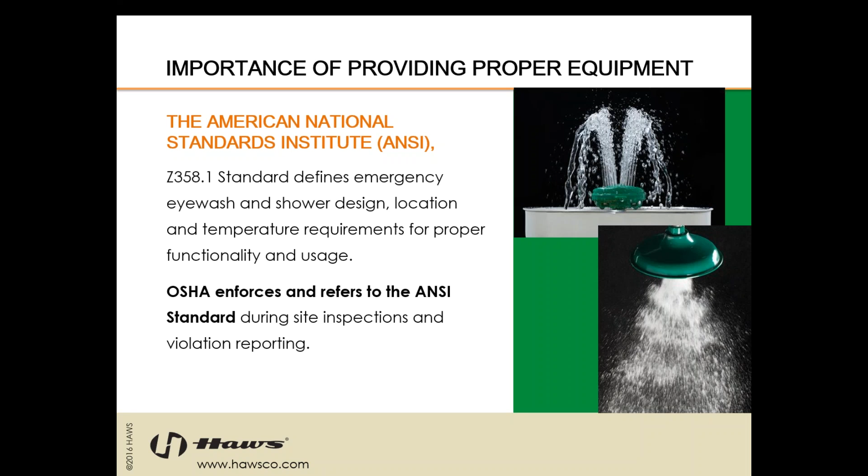The Canadian Centre for Occupational Safety and Health, also known as the CCOHS, references and recommends the ANSI standard also. Each province has its unique regulations, similar to here in the States, where each state may have unique regulations on the local or state level. The Canadian Standards Association, the CSA, also references OSHA, which again enforces the ANSI standard.

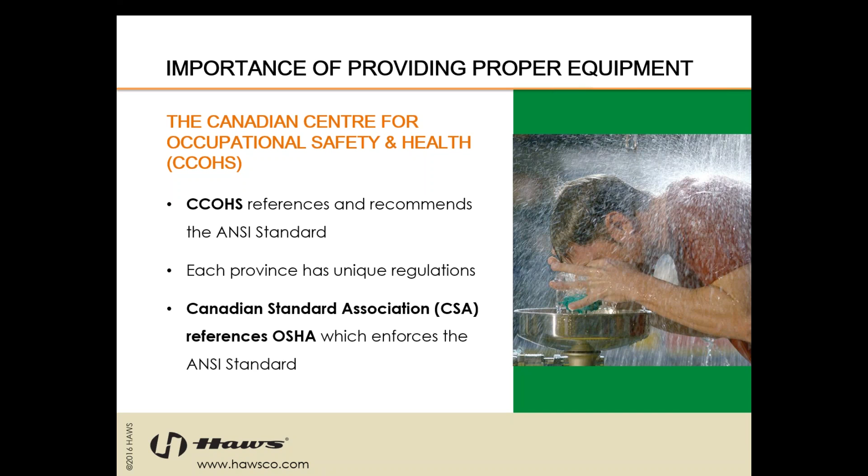Another thing that we want to point out is that OSHA fines have increased. On November 2nd of 2015, it was signed into law that OSHA fines are increasing for the first time since 1990, and they're going to increase by 80%. This actually already went into effect on August 1st of this year. An example of that is a penalty for a willful violation would rise to $127,000, up from the current $70,000, which is quite a significant fine for a willful violation.

So the important thing to do here, and the first step really, is we need to consider the potential risks. So the first thing you need to do is review your operation from the perspective of the materials that your employees handle, the volatility of said materials, and the likelihood of a spill or splash accidents that may injure employees or others around.

So in order to properly identify the equipment we need to ask a few questions. The questions are these: do the safety data sheets of materials used in your facility call for immediately flushing or drenching upon exposure to the skin or eyes? Is the hazard likely to affect the eyes, face, body, or even all three? Is there plumbing near the potential hazard? This will define whether you'll need a plumbed or a self-contained unit.

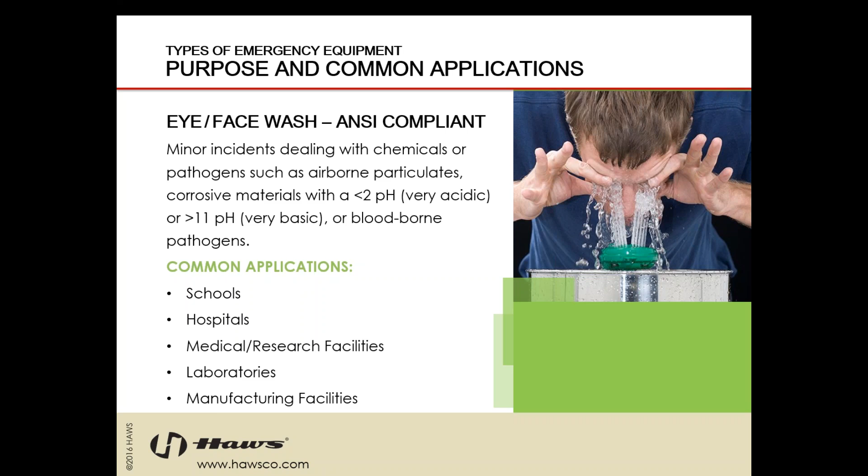A drench shower. This is a total body decontamination where a chemical acid exposure to the entire body is present, but eye-face rinse is not required. To be perfectly honest, this is kind of a rare bird in what we do. A situation where your entire body could be exposed, but the eye-face not, is very rare.

And the common applications listed here, you see loading docks, warehouses, hospital decon units. The last one there, the hospital decontamination unit, is really where we would see this most commonly. Think of a scenario where a worker has a hazmat suit on, even the helmet, the entire works. They may need to decontaminate their suit once they've removed their helmet to get access beyond into the hospital or any other areas they need. They might need to decontaminate their suit before leaving the area. So that's really where you're going to see this. Once again, not a very common application.

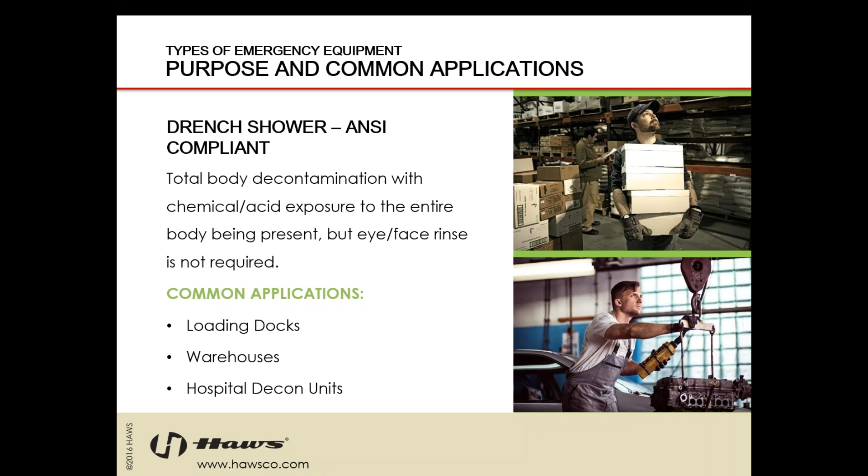In any situation where there could be a complete body coverage during a spill, we always want to assume that the eye face is also involved in that spill, which is where we come to the combination unit, really the workhorse, the most common piece of equipment that most any manufacturer will sell. These are for total eye, face, and body decontamination with highly corrosive chemical or acid exposure to the eyes, face, and body being present. Some common applications, again, chemical plants, refineries, manufacturing facilities, warehouses, but really, once again, anywhere there is a chance that there could be a hazardous spill for our employees, we want to make sure we have full body coverage, including the eyes and face.

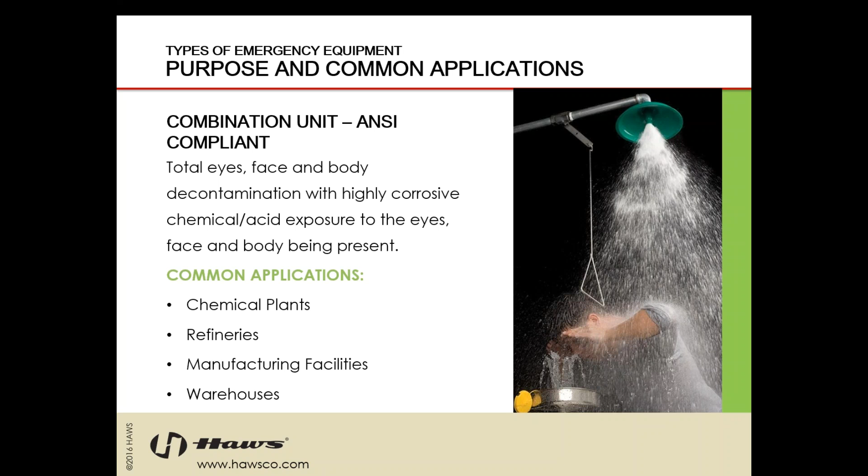Tempered water systems. These are for environments where the incoming water is not within the ANSI approved tepid water range, which was set at a minimum of 60 and a maximum of 100 degrees Fahrenheit, which is 16 to 38 Celsius. These are to be provided to the eye wash and or shower. Common applications, really any industry. Extreme climate conditions are most common. Situations where there is limited water access, or an enclosed temperature control needed.

Basically, it's too cold outside, even with tempered water, to expect someone to get into a shower for 15 minutes. As you can see on the bottom picture there, there's some snow on the ground. We can't expect someone to stand outdoors exposed for 15 minutes, even with tempered water. A heated enclosure is really ideal for that.

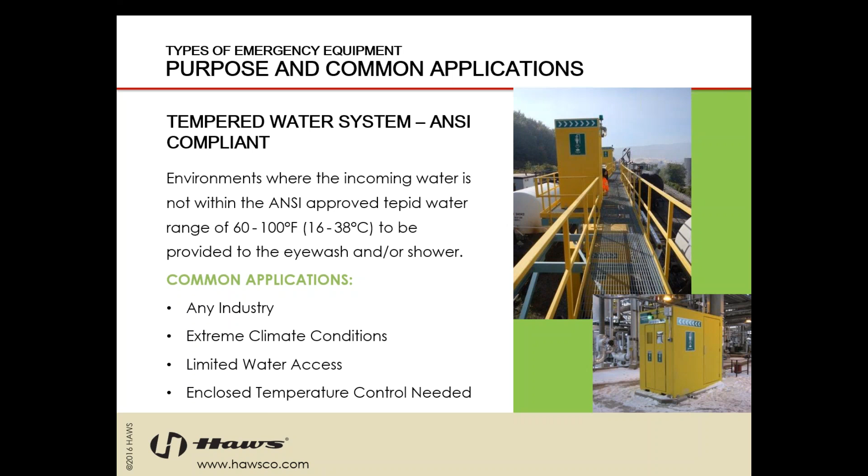Portable eye washes, these are great units. Gravity-fed or air-charged eye washes, ideal for locations without access to plumbed water. Sterile bacteriostatic additive needed to preserve the water, and Haws does have that available. Common applications, once again, wood shops, paint shops, welding shops, construction. It's important to remember portable eye washes generally are just that, an eye wash. It's generally not going to be an eye face wash.

And keep in mind with the portable eye washes, they do require a different type of maintenance versus any plumbed units. The ANSI standard says that you need to visually inspect these portable units at least once a week to ensure that the water is full and that there, of course, is water. The sterile bacteriostatic additives that you can get from manufacturers typically last about 3 months. So it does require you to empty these units, refill them with potable water and the sterile additive, and pressurize if you do have one of the air pressurized units.

Perfect. Thank you, Samantha.

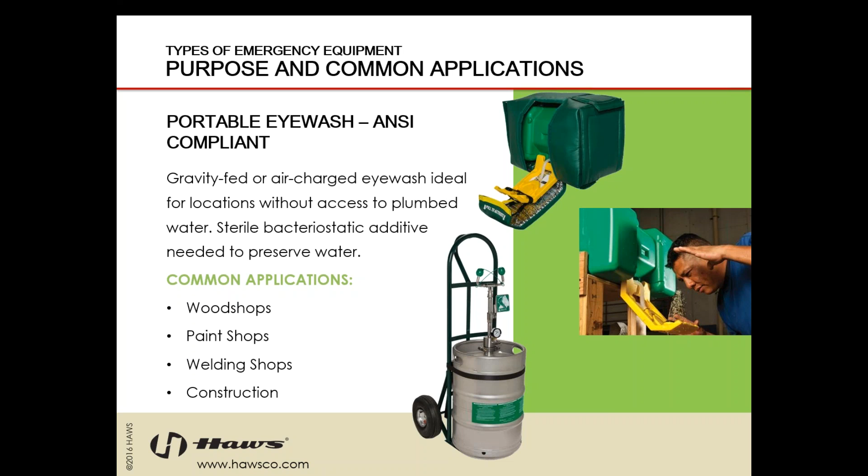All right, personal eye wash, also commonly referred to as the squeeze bottle. These are ANSI compliant as supplemental equipment, and let me explain exactly what that means, because there is a little bit of confusion in the market about these personal use bottles. It's a supplementary device that supports a plumbed or portable unit by delivering immediate flushing fluid to the eyes. Now, once again, it does not meet the ANSI Z358.1 standard for the full 15-minute required flushing period, nor is it hands-free, so it doesn't meet the standard for either of those.

What it is intended to do is to provide immediate flushing fluid to the victim while they're en route to a primary station. In other words, they can have this bottle right next to their workstation hanging on the wall. An incident occurs, they grab that bottle, give themselves the immediate relief that they need, but they're working their way towards a primary eye wash station at that point. Once again, common applications, indoor work sites, wood shops, and the most important I consider is those areas immediately adjacent to the hazard to provide first aid to someone en route to the primary equipment.

So some of the key words to keep in mind when you're working with personal eye washes or squeeze bottles is primary versus supplemental. If you go into the appendix within ANSI, there are multiple products that are considered supplemental, one being a drench hose and the other being personal eye washes. And primary means that it can provide a full 15 minutes of flushing fluid, and it does meet all the requirements of either an eye wash, eye face wash, combination shower, or tempered water system, which were the 4 that we just had gone through.

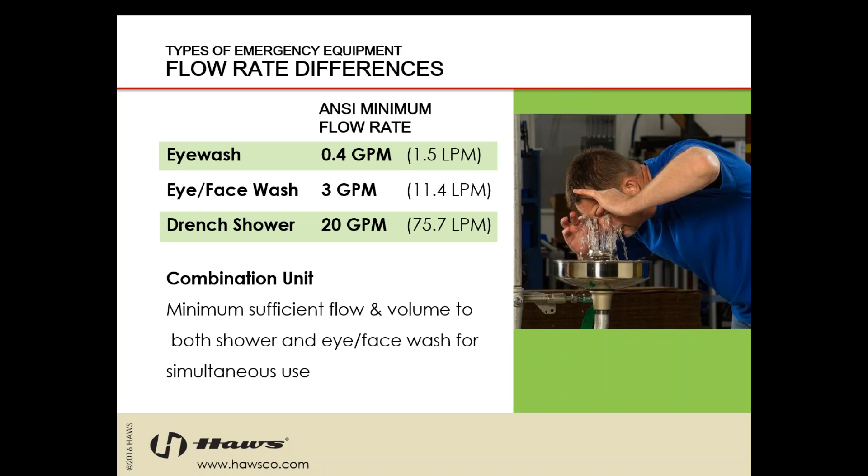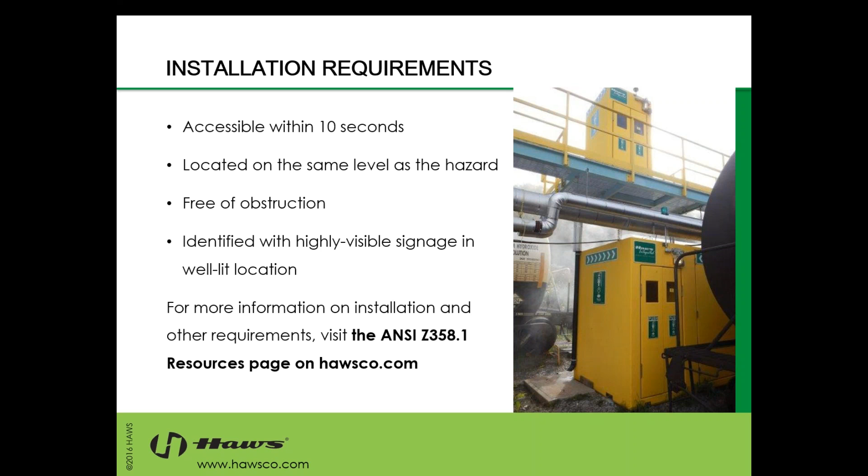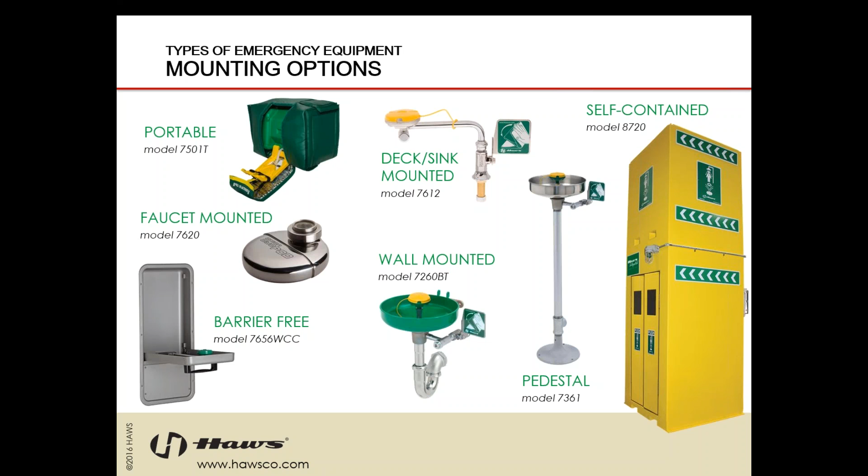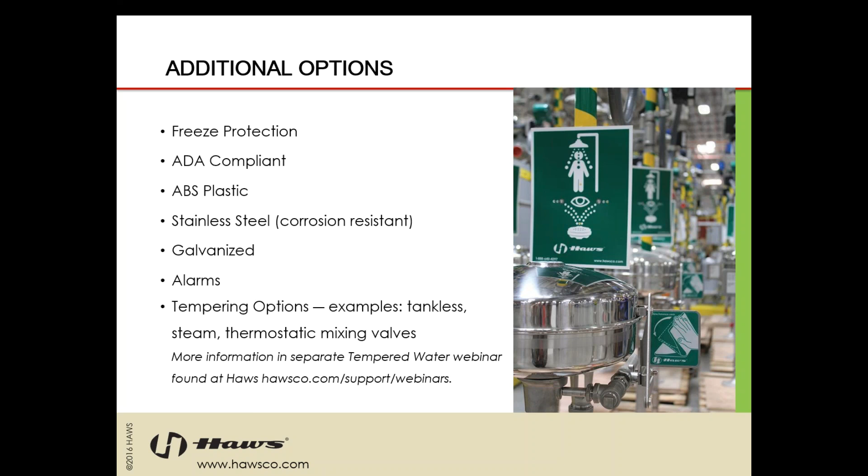And we have another poll question, Samantha. Thanks, Dennis. We'd like to know what type of emergency equipment you currently have, whether it's your facility or facilities that you're working with. Any of the personal eye washes or squeeze bottles, portable eye washes, whether gravity fed or air pressurized. Do you have any plumbed units? Or do you have, as you had seen in some various pictures, yellow or any other colored enclosed tempered water booths? Or do you not have any equipment at all at this time?

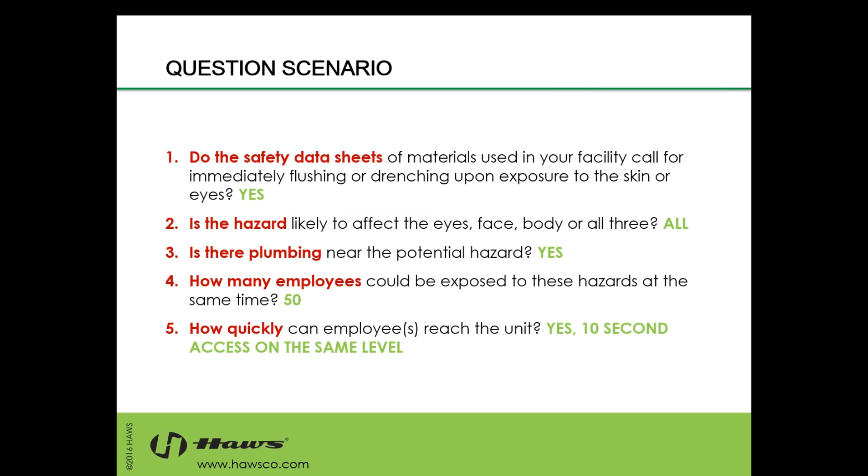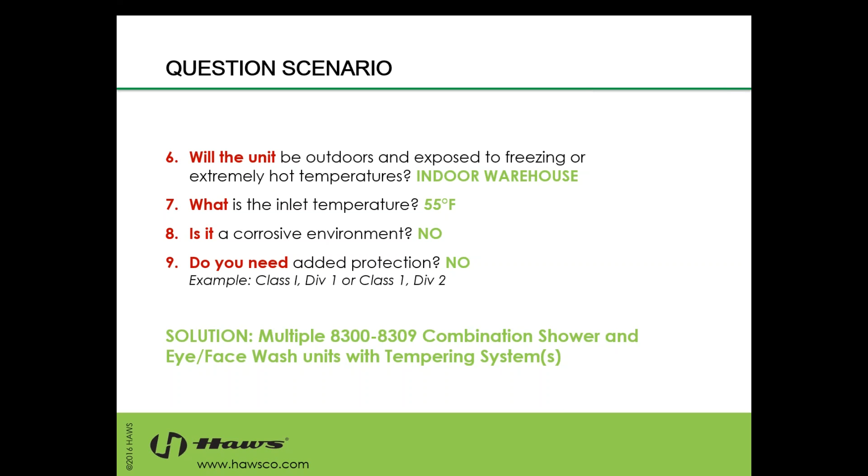Now, the tempering system could be a simple circulation loop, it could be something much more complex, and HAWS Integrated, our division of HAWS here, can help you with any scenarios like that.

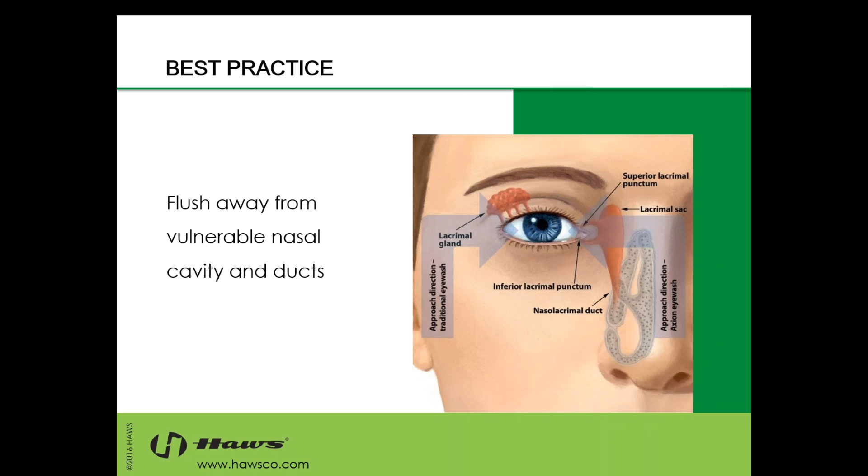When a chemical gets into the eye, there's even a chance it could work its way down into your nasal cavity, could then be breathed, causing further issues. So we just want to make sure that we're sweeping all contaminants away from those sensitive cavities and ducts, which we've actually accomplished with our Axion MSR technology. The MSR stands for Medically Superior Response.

The MSR, really, what this piece of technology does is it provides an inverted water stream to gently flush contaminants away from the glands surrounding the eye. As you can see from the picture there, the water is introduced at the inner corner of the eye next to the victim's nose and then pushed away in an outward flowing motion to sweep those contaminants away from the nose.

This really does a couple of things. It properly removes contaminants as suggested by the medical community. It also provides great victim comfort because of our laminar flow water streams. There's no disruption between the water layers. So it's constant, soft pressure and predictable stream height, which is very important.

User comfort is often overlooked, where the eyes are very sensitive, not just to chemicals, but also to pressure. And so to gently be able to provide a way for someone to sweep those contaminants away from the eye is very important, and will encourage that they stay in the eye wash for the full 15-minute flush cycle.

One question that comes up very often, someone will look at this Axion head and see it's a single head, because typically in the industry you're seeing dual heads, and that's doing exactly the opposite of what Dennis just explained. What it's potentially doing is pushing those contaminants in the eyes from the outside of the eye into the inside of the eye, potentially into your system via the tear ducts.

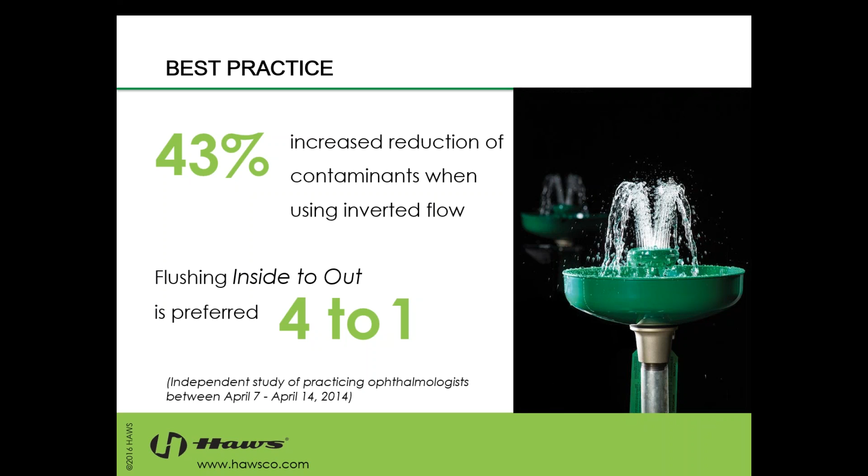All right, so another issue that we run into frequently is people we know want to do the right thing. We all want to protect our coworkers, our friends, families, anyone that we work with. The problem is that a lot of times safety professionals, safety managers, they wear many, many hats. Not only do they worry about their emergency drench equipment, but they need to worry about slip protection, fall protection, eye protection, gloves. There are many things that fall under their responsibility. So it's hard to be an expert on everything.